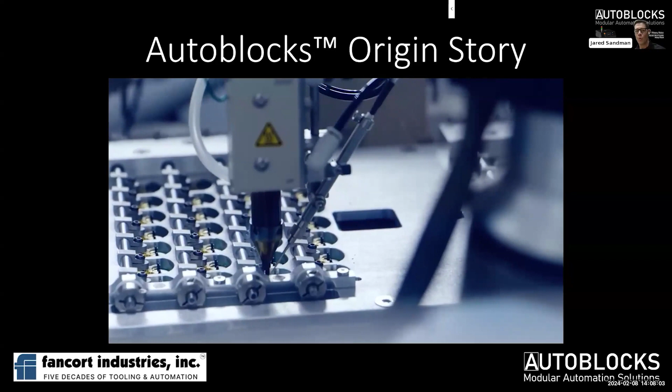But before we do that, I think it's important to give you some context about how we came about developing what I believe is a game-changing innovation in custom machine building. So what I'd like to start with is our origin story. Basically, we've been building custom machines for large industry-leading companies in aerospace and electronics manufacturing.

Edison Preciado and his team, as well as a team in New Jersey, I think we have about 30 engineers now who are building really fantastic machines to make our customers more productive and produce higher quality parts. But along the way, what we've discovered is there are some particular pain points in the industry that I think can be massively improved. That starts with cost.

A lot of custom automation can be very expensive, and there's a huge amount of the market that I think can be served by simple modular-based, block-based automation systems that can be deployed quickly, easily, be standardized in a way that is easier for maintenance and scalability, and all these things that I'm going to talk about in a minute.

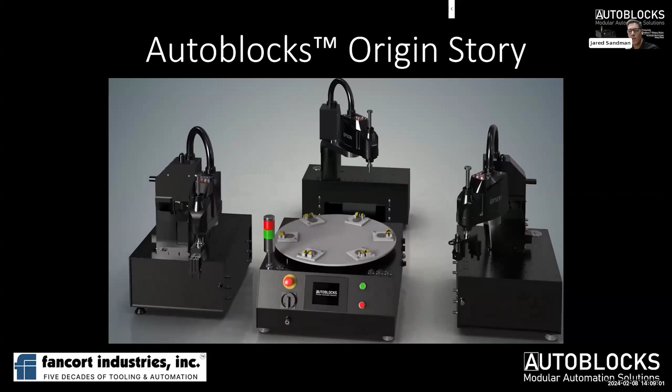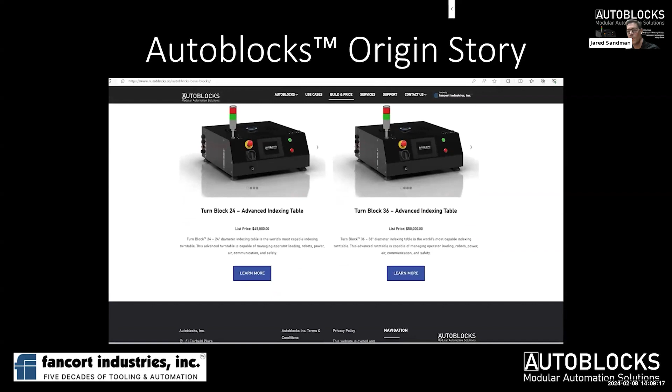Another pain point is for integrators and people who build machines. Sometimes that's an integrator. Sometimes some of the customers out there build basic systems themselves. I think you should have the ability to build your own system. And that often is out of scope for people who have limited internal resources. The purpose of AUTOBLOCKS is to be able to unlock that.

So you can have a mechanical engineer who is not a programmer or not an expert, who can design fixtures and do some decent basic mechanical engineering, but doesn't have to be an expert in machine building. And now you should have the ability to build machines.

And for integrators, the people who build machines like ourselves, not only did we develop AUTOBLOCKS to make our lives easier as integrators, this is meant to be a game-changing event for integrators. I know some people on the webinar today are integrators, and we want to enable them to grow their business and serve their customers better by using a system that makes their lives easier and more productive.

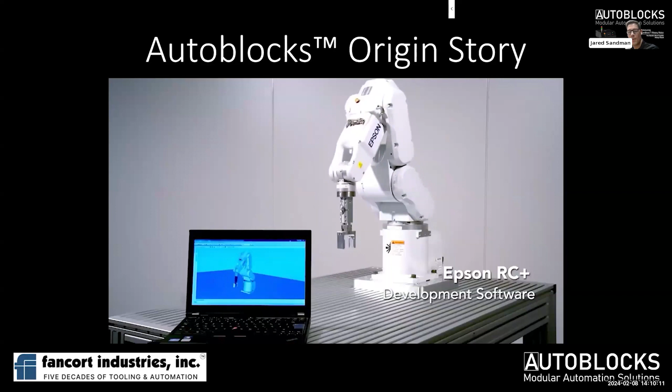And the pain points for them are availability of trained engineers and time to get things done. So AUTOBLOCKS addresses all of those pain points in a way that ultimately benefits the customer, making your business more profitable and more productive.

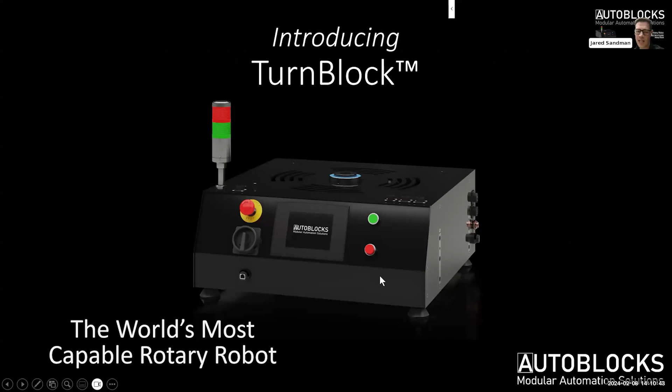So with that, what I'd like to do is introduce TurnBlock, the world's most capable rotary robot. I'll get into more detail as we go along about why we call it a rotary robot, because it actually is substantially more than just a rotary indexing table. In fact, it's a patent pending technology that we think can change everything. And it starts with being unbelievably capable.

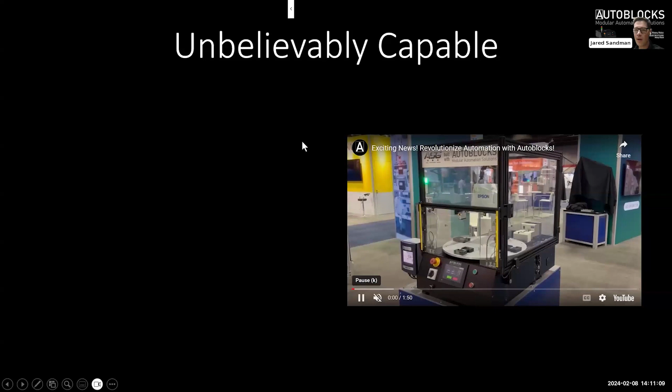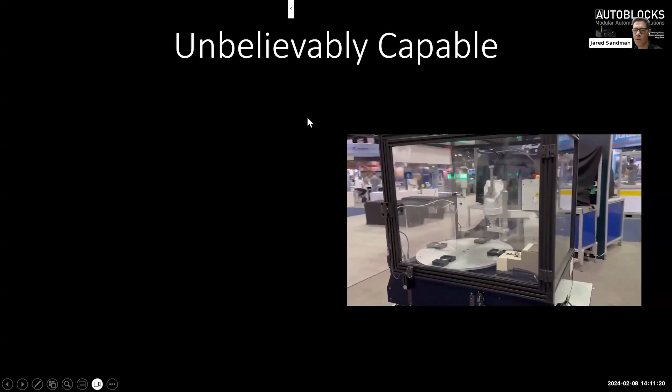What I mean by unbelievably capable is, as we've developed AUTOBLOCKS, at every moment in the development process, we constantly asked the question, what more can we get out of this machine? What more can it do? At times, this was a frustrating process for the engineers who were programming it. They would say, well, it's traditionally done this way, or it's traditionally done that way.

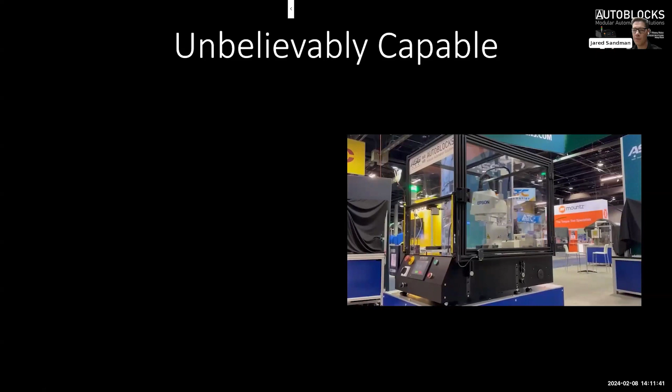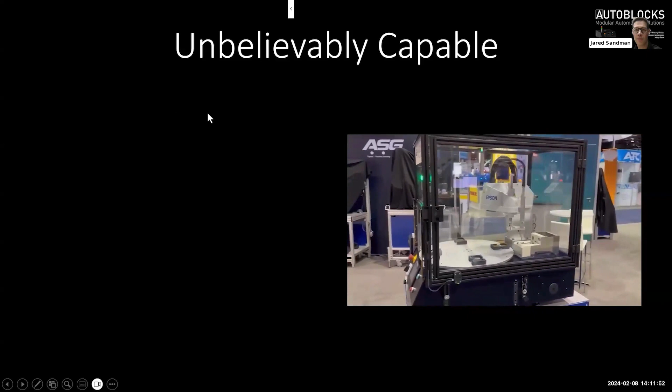And I said, well, let's make it more flexible. Let's make it more capable. And even to my own surprise, we have added unbelievable capability. One of the things that we didn't set out specifically to achieve, but I believe is one of the most important aspects of the TurnBlock, is no code machine integration.

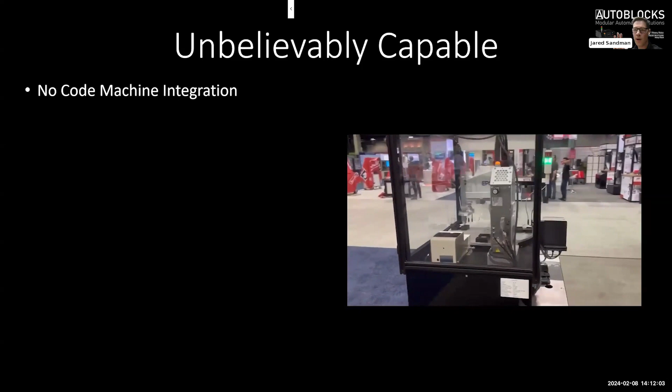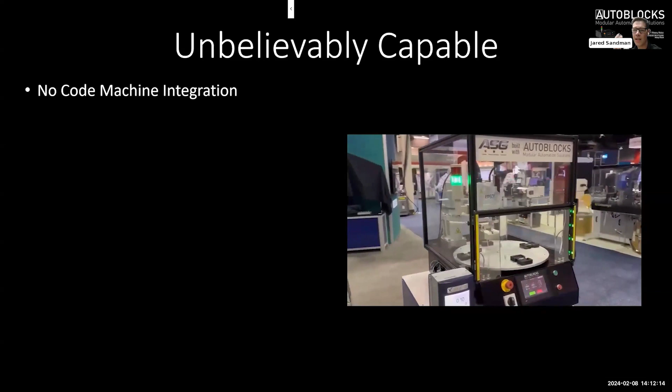That means that your devices, robots, vision systems, barcode scanners, are simply connected and turned on and off via the HMI without having to know or code a PLC. This is game changing. This means a mechanical engineer such as myself can build a system without having to study and know PLC programming.

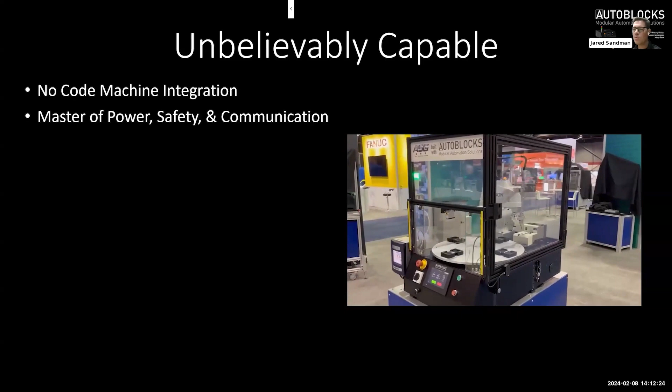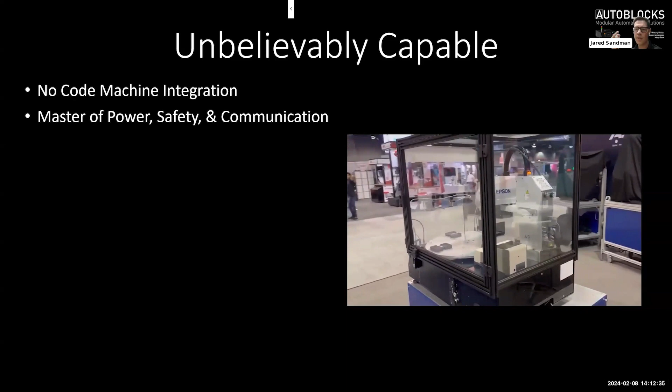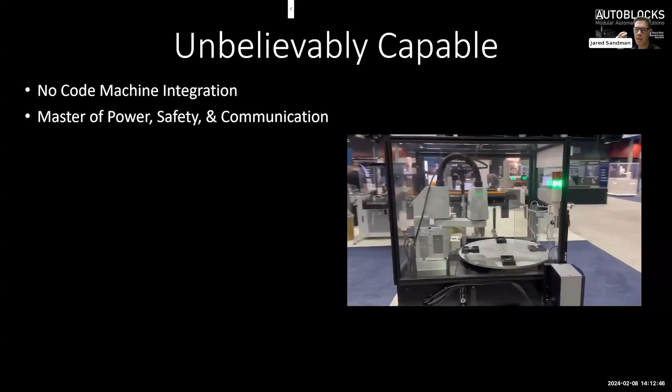The next and really critical thing whenever you're developing a system is you have to define who the master is. You have various control systems in any given machine, be it the vision sensor control program or the robot, etc. Those all have to be controlled centrally so that it can be operated in a safe, efficient manner. The TurnBlock acts as the master in any given system.

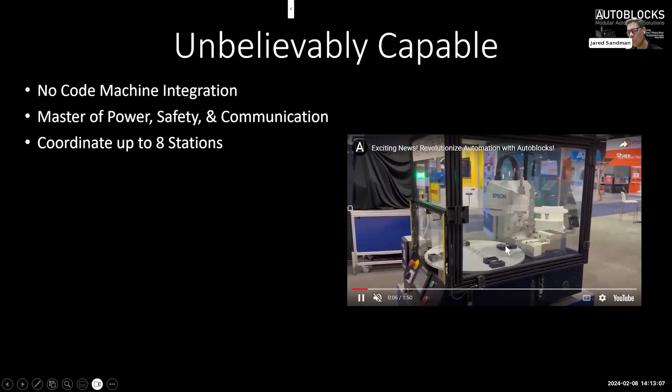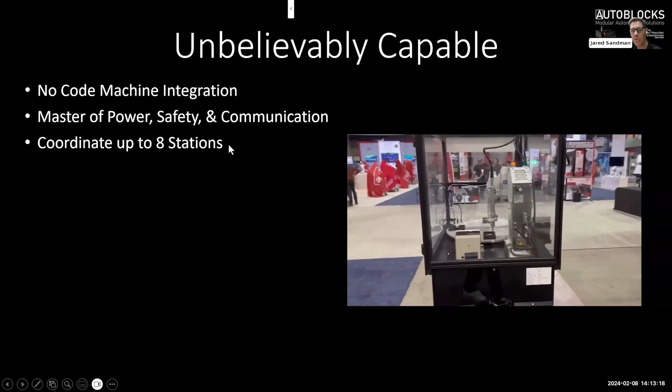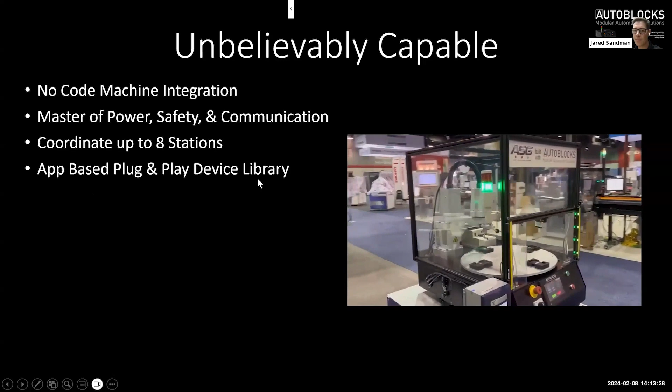And one of the things it does is it coordinates up to 8 stations. And a station, as you can see in the video here, we have 4 stations or 4 positions on the table, and those rotate through from step to step. But we can do up to 8. So if you think about it, that's quite flexible. We can do more than 8. We can do continuous operation. We can do anything. But standard through the HMI with no code is 8 stations. And you add and subtract devices via a plug-and-play device library. We'll talk about that in a minute, how you add new devices.

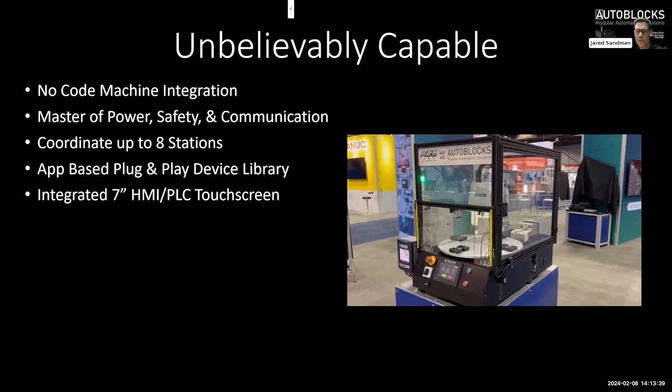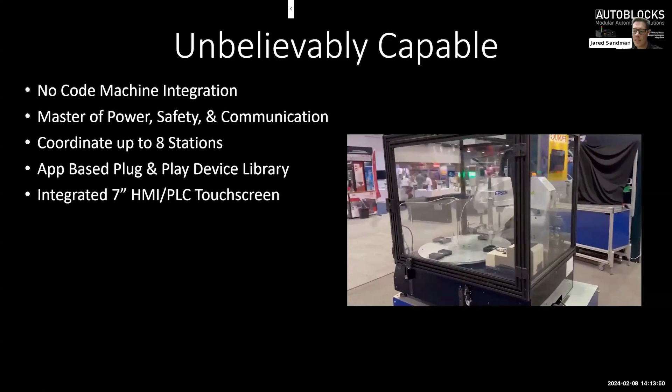It includes a really powerful 7-inch HMI PLC. This is not a low-cost PLC. This is a very capable industrial PLC that is hard-coded. You turn on the machine and it powers on immediately. It's very reliable. It's an industry-leading PLC, all inside the TurnBlock.

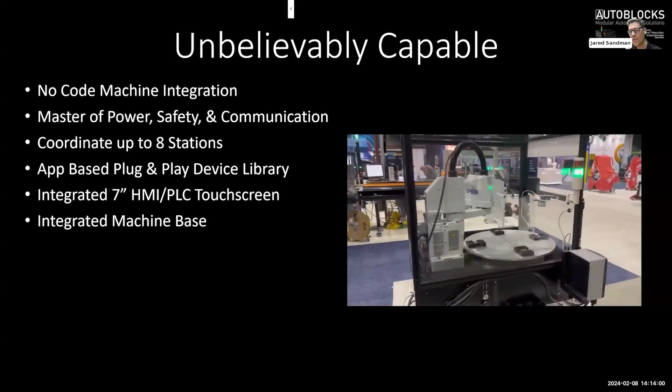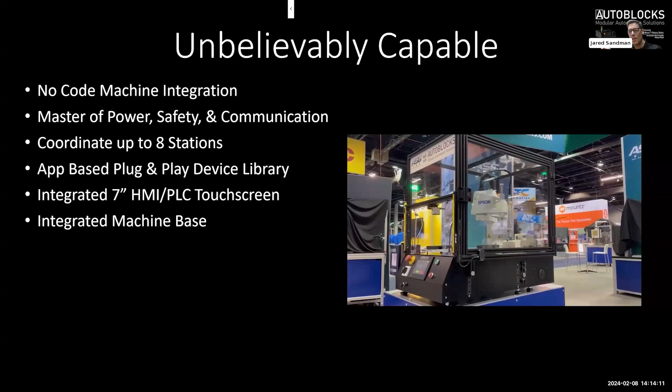It includes an integrated machine base. There's more to the TurnBlock than meets the eye, and that includes an integrated machine base. So inside this sheet metal enclosure is a base plate and a top plate, and they're sandwiched between pillars that are all tool pinned together. So you end up with a very rigid structure so that you can do precise processes on the table with additional blocks bolted to the table. And that eliminates the need for a separate machine base.

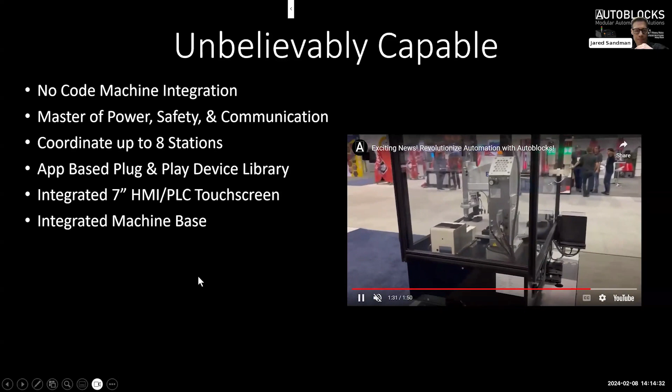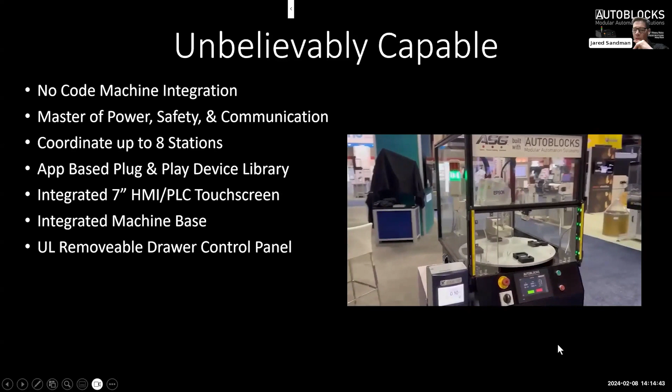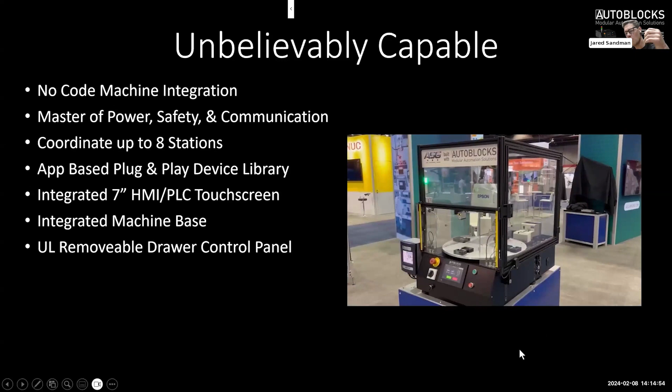It also includes a removable UL control panel. So one of the things that we came up with early on in the design process is to make the control panel horizontal and removable. That means that for all of the interconnects inside the drawer, you take out these 2 bolts you can see there in the video, and you can remove the drawer, take out the interconnects, and completely remove it and replace it or send it back for service without having to take apart the larger machine.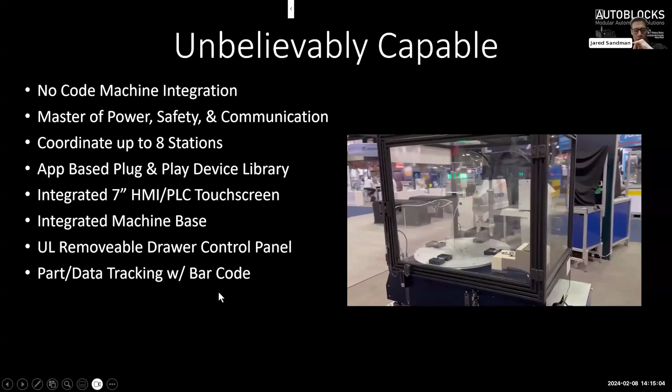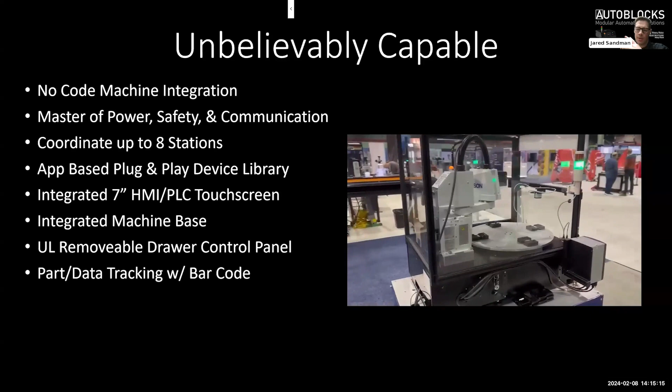It includes part and data tracking with barcode. I'll talk a little bit more about this in a minute. Not only are the parts tracked through the turntable processes as they go through, but you can also associate data with that, including recipe changing. So you can do all your data collection from, let's say, screw fastening.

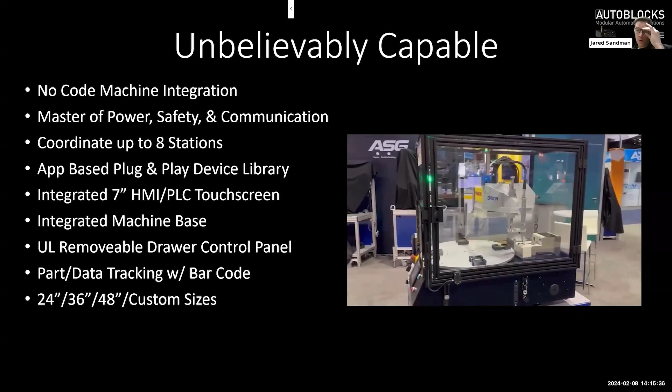Standard sizes, you can see here in the picture, this is a 24-inch diameter table. Also standard is 36 and 48. But I'm really excited about our recent development, which is to offer the controls as a back panel for integrators or others so that we can do any custom table. So now there's really no limit to the size or the complexity of the rotary system that we can build.

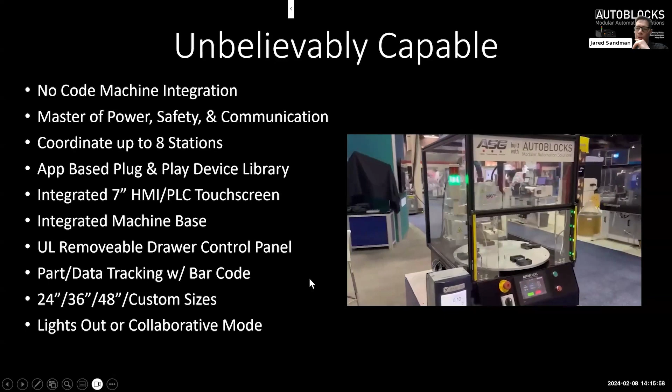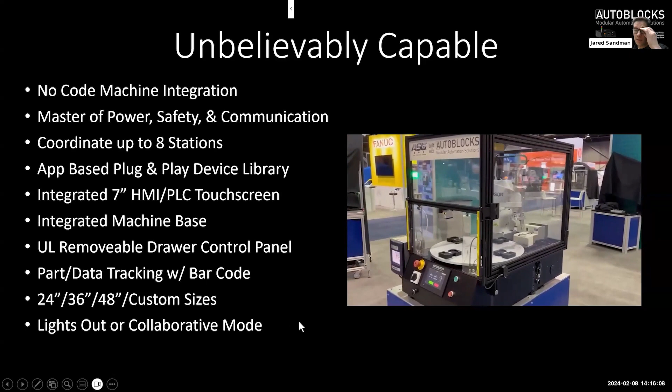And one really critical thing that we identified in our product development roadmap was to be able to have a turntable that can be lights out or collaborative. And what that means, in this picture, you can see that it has light curtains as well as a barrier wall between the operator and the robot. That would be a manual loading sequence.

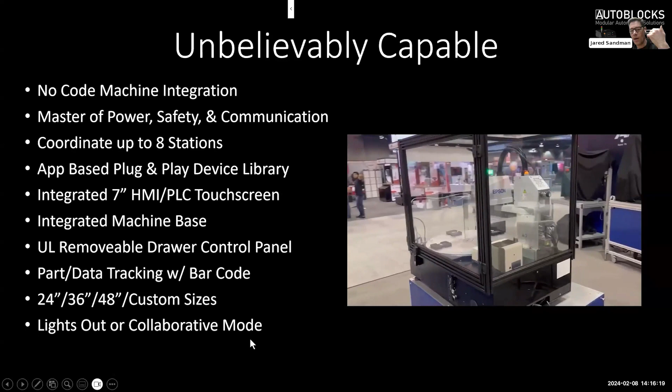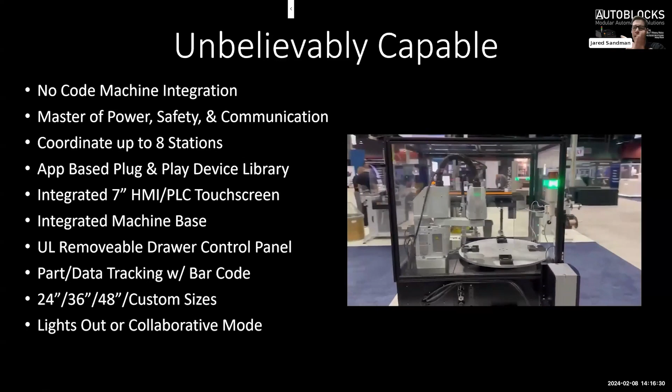And there's a very specific algorithm that keeps the operator safe, not only from the high-speed robot, but from the rotation of the table. So when the table is rotating, if it has fixtures on it, and the operator breaks that light curtain, the table instantly pauses. So the operator is safe to load and work collaboratively with an industrial robot. I think that's a really unique feature.

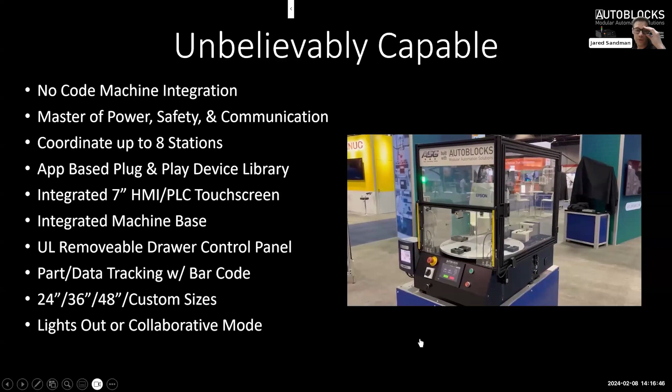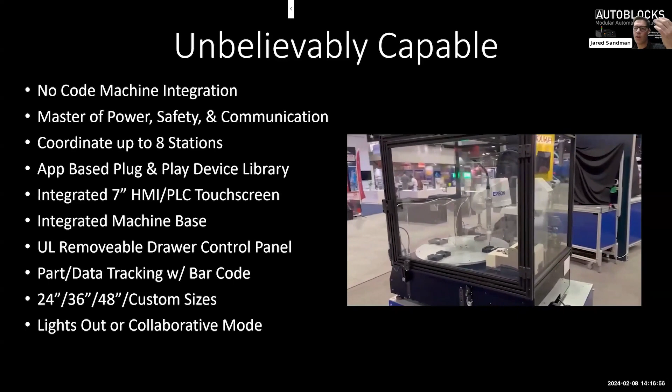But then as you grow and expand your system, you can eliminate the operator altogether and simply through the HMI configure it so that you don't have an operator, and you run it in lights out or in a batch or a buffered manner.

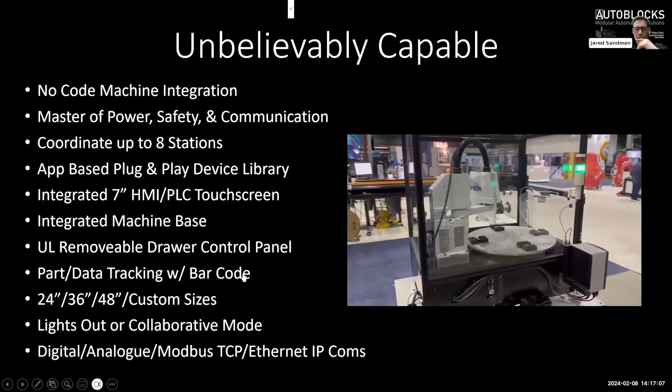And then the table itself has a huge amount of communication. And we'll talk about this a little bit more in the next couple slides about being able to expand the table, but it has digital, analog, Modbus TCP, and Ethernet IP communication, all built in, readily accessible through standard connections.

Now, here, I've been giving this presentation to many customers and getting feedback along the way. And one of the things that I often get at this point in the presentation is, it's a rotary indexing table. What's different about it? What is it? There are many people who can build this. I think it's absolutely different. In fact, we are patent pending already.

And here's just a few summary points which highlight the difference between the TurnBlock and a traditional indexing table. Obviously, the TurnBlock and an indexing table both have precision gearboxes and powerful servo motors. That's a given. We have that built into the table. But we also include your industrial PLC. This is a very expensive, capable PLC with an HMI. It includes all the software, which is preloaded so that you can accomplish no-code integration.

It includes plug-and-play safety, so it has a safety relay built in. It has the managed power we talked about, so that you can turn off power and lock out, tag out safely your machine for shutdown or maintenance. It includes a machine network. So inside the table, you have a network switch, which connects all of your devices at your stations, including the internal connection with your table. Obviously, it has a safety relay, so for things like your light curtain, as well as your remote devices.

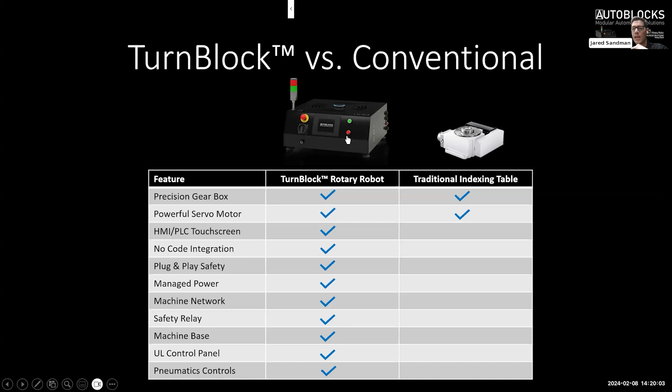It also includes a pressure sensor so that you can determine if the table has pneumatics, if it has a loss of air, and you can also do a safety pneumatic dump valve. So if somebody hits an e-stop and your particular application requires that there can be no stored energy, such as pneumatic pressure, that can also be easily set up. So quite a bit of difference. You're basically talking about a turntable with the brain. It's the entire brain of the system.

Now, a little bit more about plug and play. Obviously, we all know what plug and play is. When we plug things into our laptop or whatever, it should simply work. This was the goal and is what we've accomplished with the TurnBlock software. You have plug and play Universal Robots, Epson robots, SMC pneumatics, Keyence safety, and vision and barcode devices. And also, that library can continually and easily expand via the apps.

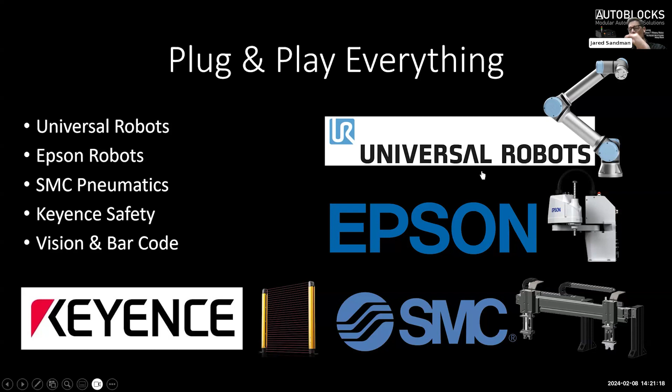And apps, this is a PLC, and in the PLC sense, an app ends up being something akin to a user-defined function block, and you know what those protocols and those parameters are. And we define those so that we can easily develop new apps ourselves for you, or you as integrators out there can set up your own apps, and it's all no license. So this PLC is a no license PLC. So that means when you have the code, you own it, and you can upgrade it to a certain extent. You can upgrade the apps. The core code is locked and protected so that it doesn't become corrupted, but it's a no license platform.

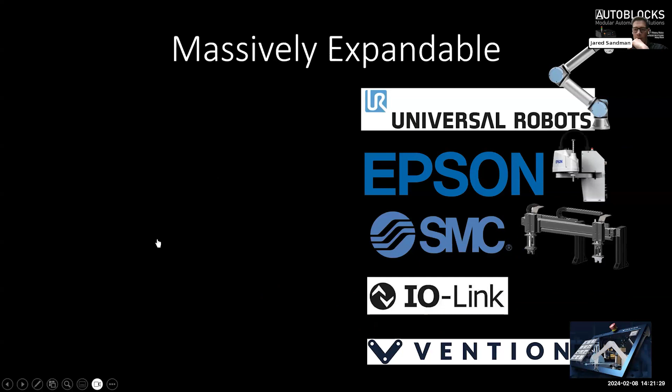One thing that we also wanted, and we constantly challenged ourselves during the development process, is to make this thing as expandable and future-proof as possible. And this definitely was a bit frustrating at times, because we keep asking the question, what else can we do? What else can we add? And again, I think it's a credit to the engineers that worked on this, that we were able to make something that is essentially unlimited in terms of its ability to be expanded.

So obviously you can add up to 8 robots, whether it be Universal or Epson. And future robots are simply added via an app. So there's no limit even to the robots. You can add up to 32 axes of pneumatic motion, which is absolutely mind-boggling. It might not even be able to fit on, let's say, a 24-inch turntable. But again, you can change the size of the turntable, 36, 48, and then if you do a remote control panel, you can do any size.

So 32 axes of motion is quite important, and it's a really good, reliable, low-cost way of adding motion to your rotary system. Rather than adding a robot, you can simply have a pick and place, or you can have something twist or something flip. And I'll talk about that a little bit more in a minute.

Also, the amount of I/O that the table has: it has 3 input, 5 output, analog, Ethernet, and Modbus TCP on all 3 stations. It also has an auxiliary 3 in, 5 out on the rear.

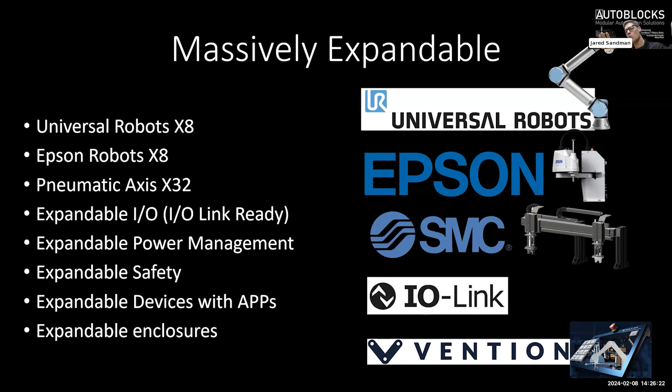But when you need an enclosure, we want that enclosure to be able to be bolted on very quickly from standard components such as Vention, 80/20, and robot units, your standard extrusion suppliers. For those of you who have done it, you can simply send them a model and they send you a kit, either fully assembled or a bill of material, and you put it on. So we felt that the enclosures should be built to the machine and therefore very flexible.

Another thing that we think is really important, and we wanted to consider right from the get-go with AUTOBLOCKS, is to have it connected via IIoT 4.0. So basically what this means is the machine, as we said, has its internal network, and that internal network can be connected to a local area network via hard connection or via a gate. In this situation, you would buy a gate, and the gate can even have a cellular connection.

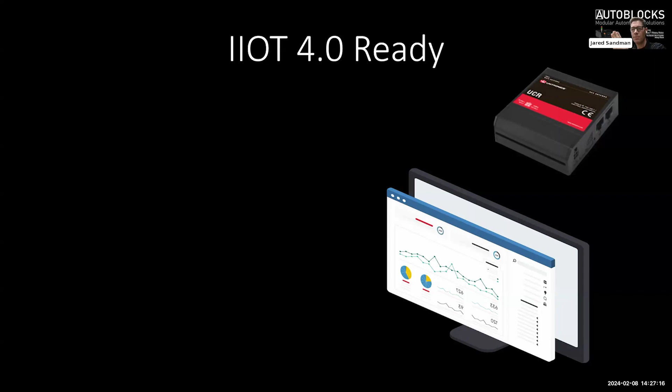All that is regulated and controlled by the customer, and there are ISO standards that apply to cybersecurity. So these are safe and secure connections, and it's at your option to connect or not to connect. And when you do, what we've done with the machine is we've configured it so that you can actually monitor your data via no-code cloud dashboards.

This is really neat. So you're able to go on, have a dashboard, display your widgets, display your data, download your data to spreadsheets, manipulate your data, all from any laptop, cell phone, or any website. So you can do that, and you can customize it all with no code and access your data from your machine.

And when you do connect your AUTOBLOCKS machine to the internet, you can enjoy remote support. So one thing that we have discovered is that we want to be able to provide maximum support. So if your machine has any issue whatsoever, we want to be able to simply access your machine if necessary and talk you through a remote troubleshooting session.

So because you have an on-machine network, when you connect that network, we're able to troubleshoot the PLC, read your fault codes, update or improve the PLC software. We can also access anything on that machine network, including vision systems and robots. So the remote support, governed by very carefully configured cybersecurity, is a great way to drastically reduce our response time and improve your ability to keep your machine running.

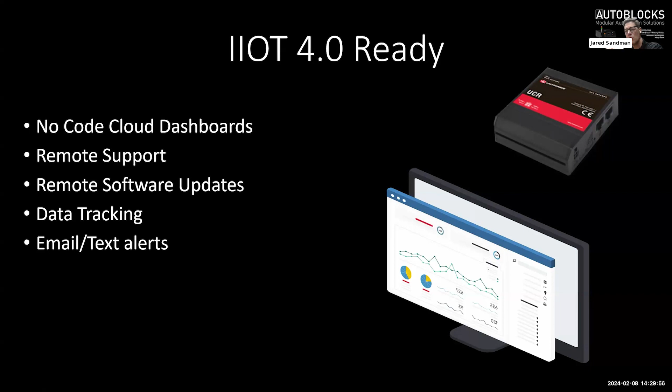The emails can also be at the end of the shift. You can have it consolidate all the data from that shift and email it to you. So you don't have to actually get into the machine to get data. It can just send you that data, which is really neat. It's SQL client ready, which means it can be set up to collect that data and push it to a sophisticated SQL database. It also comes with customizable maintenance schedules.

So it's a standard machine with standard software, but let's say you have robotic soldering on it where you need a tip that needs to be replaced every few shifts. You can set that schedule on the machine, and it'll send that alert to you and tell you when to change that tip. So your planned maintenance, your PMs, can be scheduled and set up right through the machine.

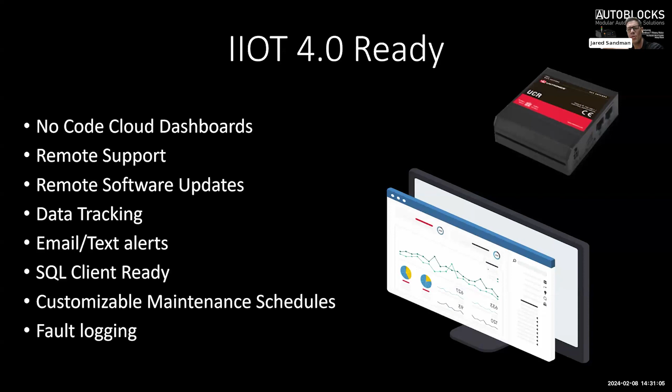Fault logging is kind of standard in the industry, but on this machine you also have fault logging, so that if you want to see how often is my machine faulting, what are the faults, you can go to the log screen and see what the fault history is.

The result of all this is maximum flexibility. And again, when we keep asking ourselves how we can improve and what we can achieve, as a group, at least for me, I'm surprised what we're able to achieve. And the same thing applies for the flexibility of an AUTOBLOCKS system. It starts with the ability to expand with growth. So if you buy or build yourself an AutoBlocks system that is a single or two station, and you want to add an additional station or add capabilities, you can expand as your business grows.

That means when you're building your production processes, you don't have to feel like you have to buy a machine to support the capacity that's going to come in 1 or 2 years. You can buy that machine for today's production requirements without having to make that investment and potentially take the risk of buying something that is looking too far ahead. You can simply expand as you go.

Just like any robot, you can repurpose it as needs change. So you can take the AutoBlocks and you can change the robots, change the devices, and you can repurpose it. You can combine it with multiple machines. This is a surprising and somewhat unintuitive thing right away.

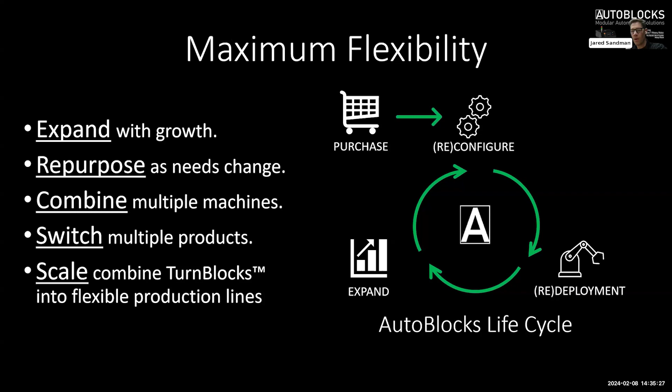Now what I'm going to do is take a few minutes here to go through the software HMI. We're on our 14th revision, and we've spent a lot of time refining the HMI. The goal here, right from the beginning, was to create an HMI intuitive enough that with a few minutes of discussion, an operator should be able to run it. It really shouldn't require a big training session - it should be very straightforward.

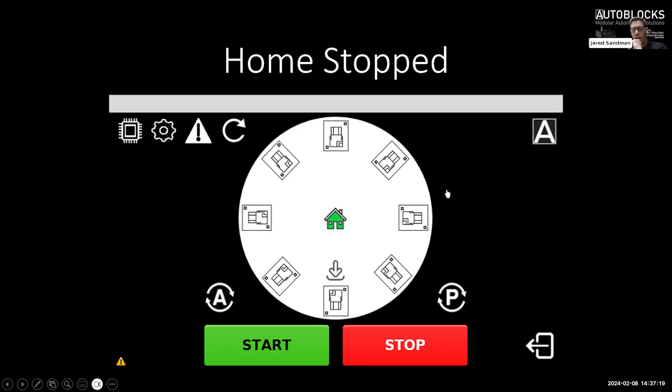Obviously you have your start and stop, and then a log out icon here, so you have user control. An operator only has access to the home screen and recipe. Everything else is under admin-controlled separate password, and it logs out automatically after 30 minutes so that you're controlled and secure. So what happens in a turntable situation - you press start and press the auto button here, which is now lit up on the left-hand side.

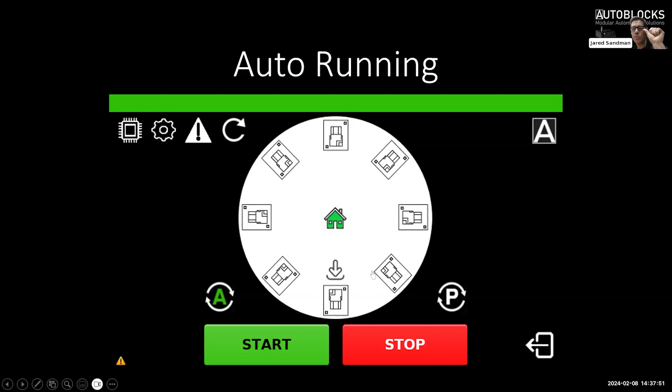And you can see the strip on the top lights green, so anybody standing 5 feet away knows exactly the state of the machine. Obviously this is reflected on the light tower as well, but we want this to be very intuitive right in front of the operator on their home screen. Now that it's auto and running, you can see the arrow pointing to the fixture, indicating that it's ready to load. You load a part and it turns green, so you know there's a part there. Then it indexes and you can see the part flow in.

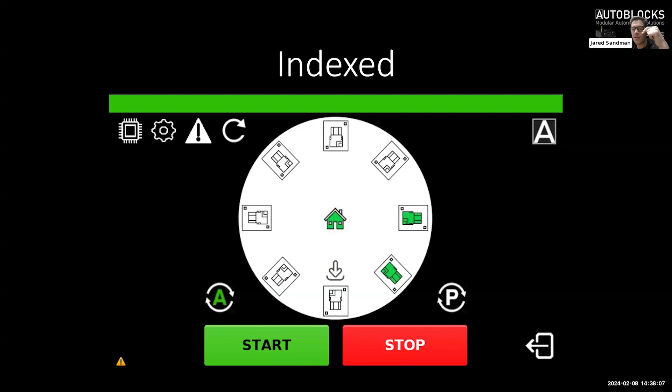Then the arrow is telling you to put another part in. Then it indexes: add part, index, add part, index, add part, and so on, until you see the last part, or the first part that you loaded, making its way back to the load position.

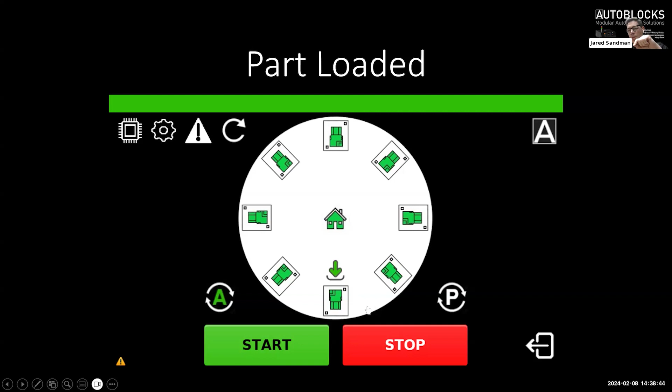This is a critical transition point. It's finally made it through all of the process steps and it's in the home position. Now, it's really important because an operator here could step away, and I need to ensure that part is removed from the machine and does not maintain its position and continue to process around.

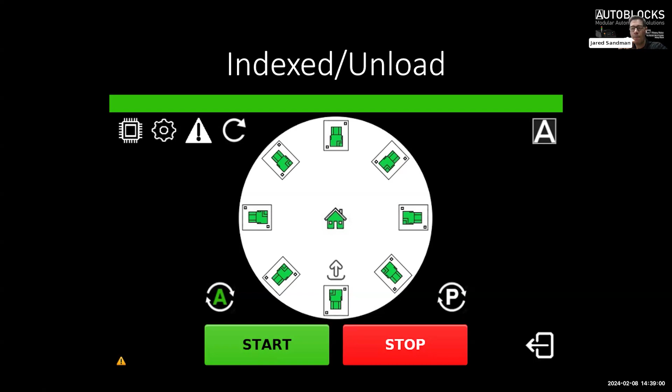So as soon as that last part comes back to its home position, the arrow flips up and tells anybody who comes up to this machine mid-process that the part in the load position needs to be removed. So you remove the part, and then it says, all right, now I'm ready for you to load a part. So this arrow tells you very straightforwardly when you need to load and unload the part.

This is really critical for that collaborative process where you have an operator. This arrow, in a lights-out situation, shuts off completely because you don't need it. It's really geared towards an operator.

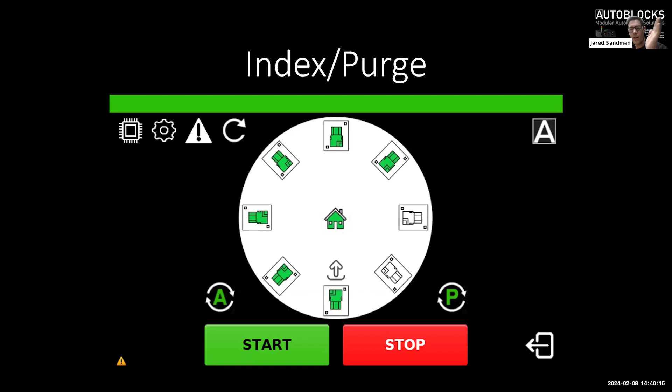And the up arrow is always pointing up because it's saying unload the parts. In this mode, you only unload parts, and it indexes and doesn't ask for more parts. So the purge function is a very careful algorithm to make sure that you're able to unload parts safely and keep them tracked the whole way.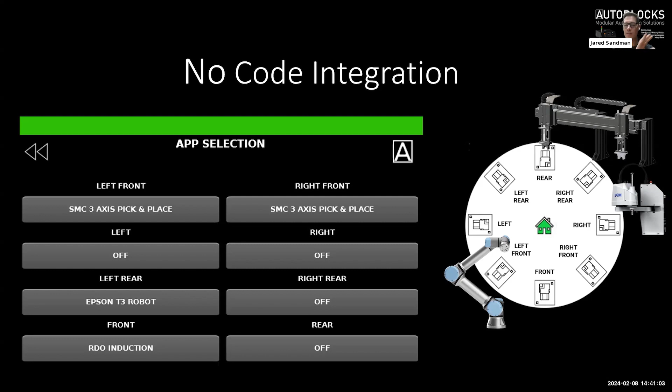Here you see it says SMC 3-axis pick and place. You click on that button, a window pops up, and you're able to select what device you have there. So this is the essence of no-code integration. You simply select what you want and it turns on that communication. Obviously, you plug in that device or change the device in the physical world, but from a programming perspective, it's as simple as that.

Now, pneumatic robots. This is really interesting. You can simply add 4 axes of pneumatic motion to any of those 8 stations. And you do that by simply looking at this one simple screen.

After you select that, you go to that station, select that app, and say you want the SMC pneumatic robot on station, in this case the left station. This screen pops up and you say where do those actuators, what positions do they need to be when I start up my table, i.e. their home position.

So you select which position they are, and if for some reason you wired it wrong and you want to flip it, you can just go A to B, B to A. You don't have to change the wiring. And if you only have one axis, 2, 3, or 4, you just select NA, and it just comments out that area of the code. So you don't need to, you can have 1 to 4.

And then once you select your home position, you simply go to this table here and turn on the position of each actuator in a sequential nature, starting with row 1 through 8. What you do is change from if it stays the same position, if you go down one row and it's AA, that means the actuator doesn't move. If it flips from A to B, then you get a motion, and you can have a dwell time at each position. So you can, if you think about it, go pick, place, over, pause, down, pick, place, over, down. And you can do all of that simply through this screen.

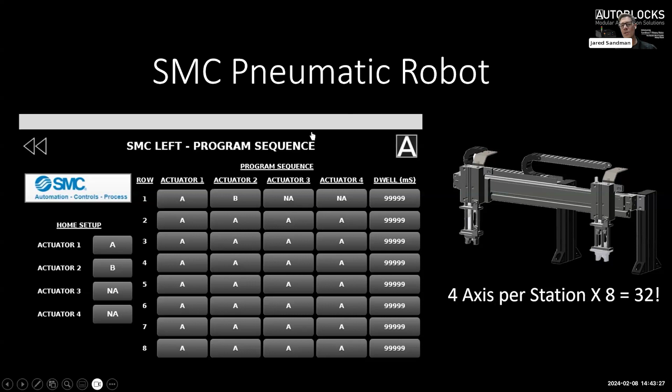So again, that's 4 axes times 8 stations, 32 total axes. And these can be rotary, linear, gripper, any type of pneumatic motion, 2-position, 2 sensors. Built into this in the back end is position sensors for each axis. And when the robot moves, if it has a hang up or it doesn't achieve that position, you'll get a fault code on the HMI.

So you even have fault handling built into the pneumatic motion. Basically, the possibilities are really endless. As long as it can fit on a table, and it's 1 to 8 steps, and the table can be 24, 36, 48, 6 foot, 8 foot, whatever size diameter you want. If you can fit it on a table, it can be handled with AUTOBLOCKS. So the possibilities are just endless.

Shown here is a 24-inch. 36 is basically the same thing. It's not a lot of, it's basically the same structure in an expanded format, and it's not substantially more money. It's just basically the size of the enclosure in the table.

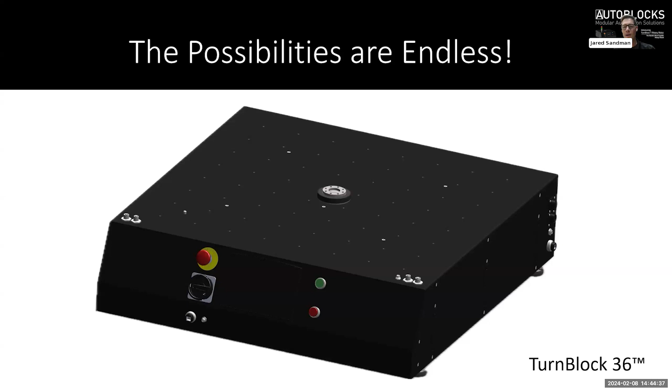The gearboxes, there's 3 gearbox options with 10, 5, and 3 arc minute backlash. So really, really precise planetary gearboxes. These are German gearboxes that are extremely precise.

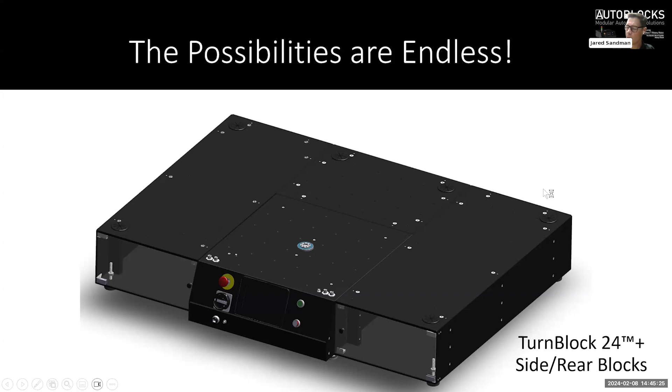These are our design side block designs, which you can purchase from us. But for the integrators out there, if you want to use extrusions or your own plates or any other creative design, it can bolt directly to the table. It's really up to you.

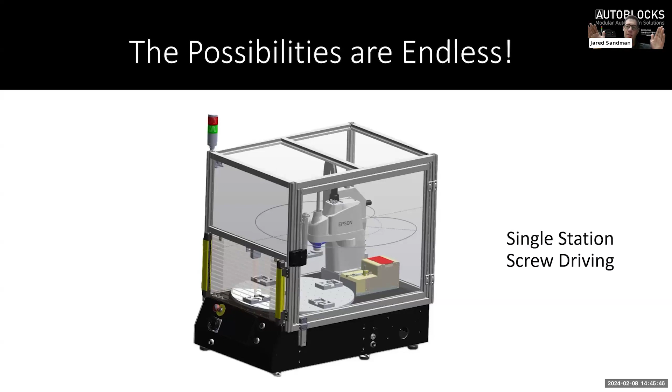And you can start with something simple. This is basically a rendering of the machine that you'll see in a moment. This is a screw-driving single station, basically desktop. It's very lean, it's very low cost, and it can be put on a desk. And then in the future, when you need to redeploy or expand, you can expand this in all directions and put it on a base. So the same thing can take a little desktop and you can grow it into a full-size machine.

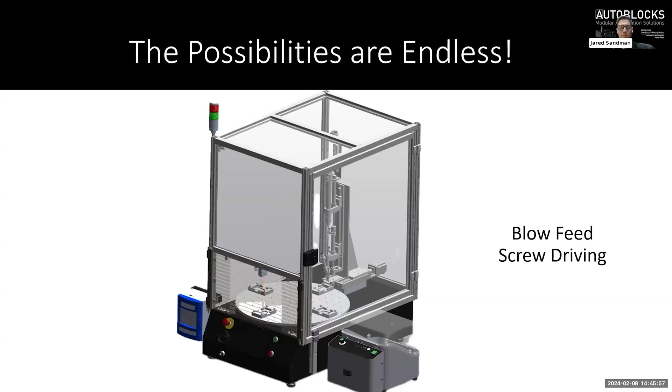So this is just another example of a system we've designed. You can do blow feed screw fastening, multiple robots. This is kind of 2 robots, so you can do 3. And you can set it up lights out or collaborative. In this case, you can see you can have 2 robots and you can have an operator standing in front of it. And you can get the benefits of high-speed robots, which are these days Epson robots and other robots that are out there, very low cost, highly capable.

And you can leverage that with an operator and still work in a safe manner. Or you can change it over to be a lights out situation. And what you're going to see in the coming months, we're going to do webinars where we show AUTOBLOCKS built with flex feeders, conveyors, the whole 9 yards. We'll be going to Apex in the next couple months, and we'll have those machines ready, and we'll be displaying those.

Here, this is just again to kind of stimulate your thoughts. Obviously, you can put universal robots on or any collaborative robot without an enclosure.

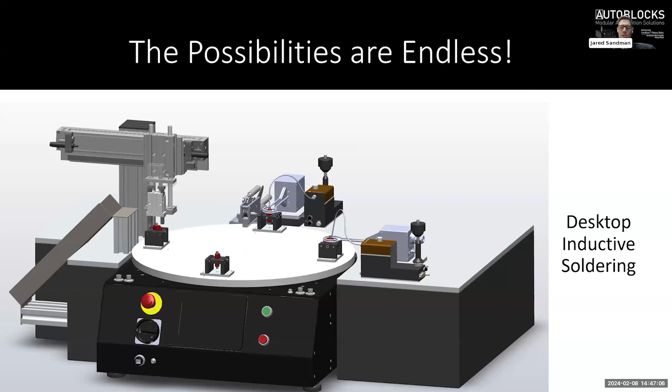You can do niche processes such as induction. We have an induction sister company called RDO Induction. And here you see induction reflow, induction heating with Japan Unix wire feeding. In this case, you put a part on, you would solder one side with wire and induction, it would flip over and you do it, and then off on the left-hand side.

Here's an example of a pneumatic pick and place. So if you want the operator to be really productive, they can simply load very quickly, and the pneumatic robot can unload. Or you could have an inspection process where you inspect and then it tracks the data, says good or bad, and the pneumatic robot can pick and place into a bad bin or a good bin.

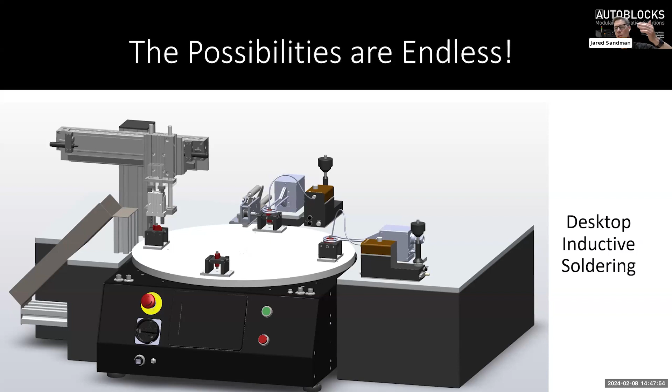So there's really just a lot of wonderful things that you can do with the turntable. This is a rendering of the machine that's being built here, and we're ready for demonstration in about 4 to 6 weeks. This is a TurnBlock 24 with an Epson robot, with an Epson camera vision system, picking from a flexible feeder, placing it onto the table, inspection with a Zebra vision camera, and then the pneumatic robot picking, placing it onto a conveyor and feeding it back.

This is obviously a circular process, but it demonstrates the kind of capabilities that you can enjoy with AUTOBLOCKS. And then you can see here, it's the same machine. You can put a full enclosure around it, so you can imagine it more than just a desktop. It can be integrated, and these enclosures end up becoming very low cost with AUTOBLOCKS because basically they're extrusion only, and they can be non-structural work surfaces, or not. Or they can be just basically either laser cut or water jet work surfaces, because the TurnBlock ends up being your mechanical anchor.

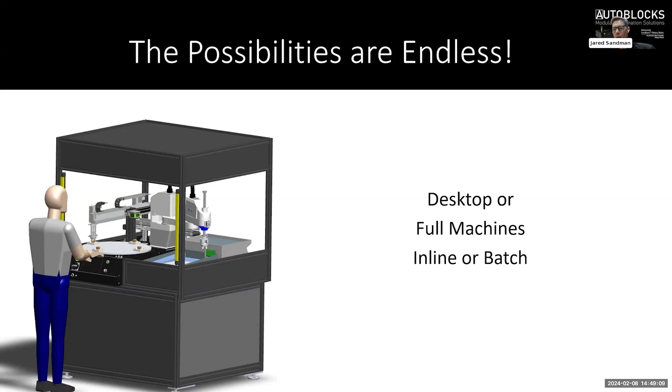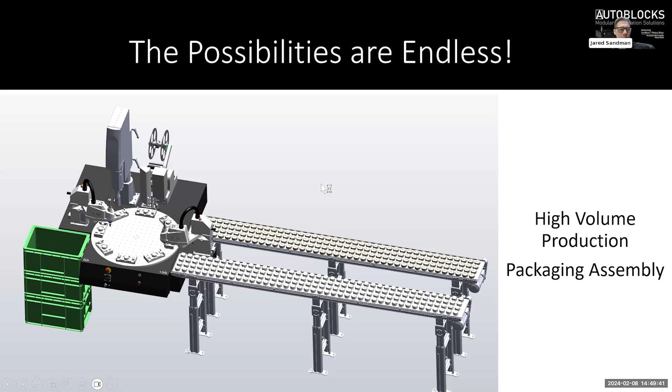Here's an example of a system where you can do amazingly high volume production. So you can in-feed, let's say, 2 parts of a consumer bottling application, and a vision system and a robot can pick and place, assemble them on the table. This is a 36-inch TurnBlock with a label applicator, ultrasonic welding, and then pick and place, unload. Just another example of things that you can imagine. Another niche one, just to kind of continue to show the flexibility.

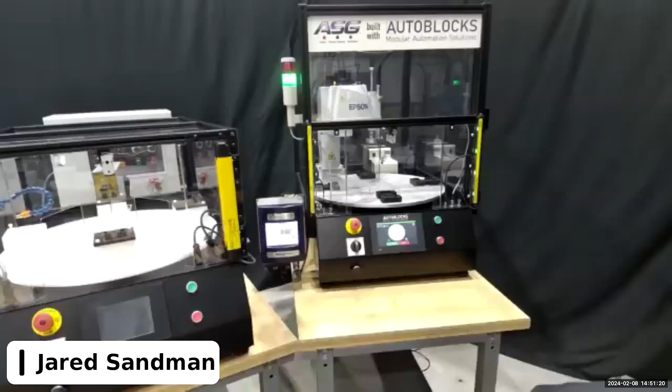And with that, what I'm going to do is I'm going to transition my camera here, and I'm going to stop sharing. And I'm going to change my background. All right, guys. I think everybody can see me here.

So what we have here is a couple of AUTOBLOCKS systems that we've recently built, just to kind of show you in real life what we have here. So this is our most recent development. This is a 24-inch TurnBlock table with your 7-inch HMI, your lockout/tagout, your e-stop, and your start and stop buttons. Ethernet connection in the front. Then what you have here is your Keyence light curtains, and you can see here there's a Keyence factory cable that you order direct, and you simply take this, plug it directly in, and it works.

You have your door switch. So your door switch is also plug and play. It's an RFID door switch here. It's one door switch right now, but you can daisy chain as many as you need. So you can expand your enclosure and have multiple door switches. On the other side here, we have our part presence sensor. So you can see as I take the part in and out, the machine recognizes the part in the fixture, which is really critical for rotary processes.

We have our screw fastening controller here, X-PAQ ASG, also a partner of AutoBlocks. You can see this machine was built in collaboration with them, and we brought this to a trade show. In the back here on the right-hand side, we have our I/O and our power and our Ethernet connection, same on the reverse side and the left-hand side.